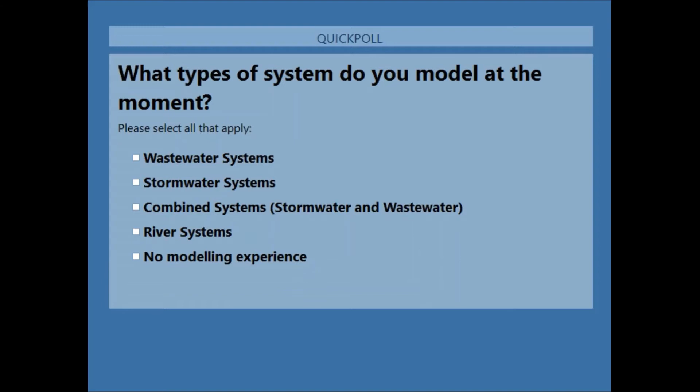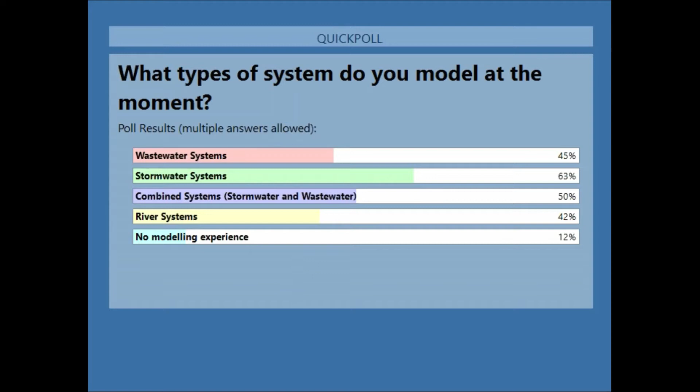And it's a good result - we're seeing a very even breakdown of the audience today as to who's been involved in the different aspects of wastewater modeling, stormwater modeling, or combined system modeling, and a good percentage of people get involved with river modeling as well, which is really good to see. The people who've not done any modeling, you are very welcome - 12% of you today, so that's a good number. Good to see you here, and hopefully you can take on board some of the things we're going to be looking at today. Let's hide that now and move on with the rest of the presentation.

So let's carry on with that and see where we're going. Right, let's go back to my PowerPoint slide. So that's where we were, and we were looking at those different aspects of the different types of models that you can do.

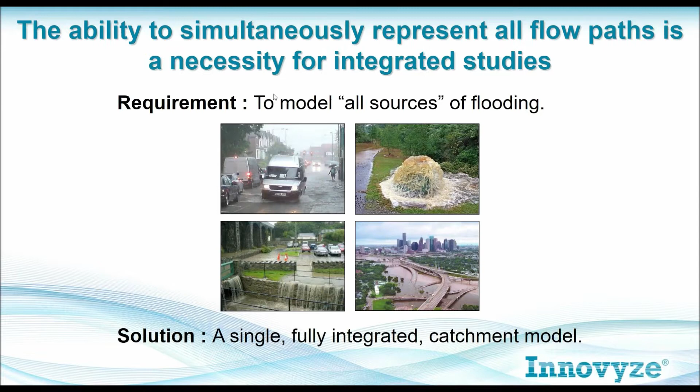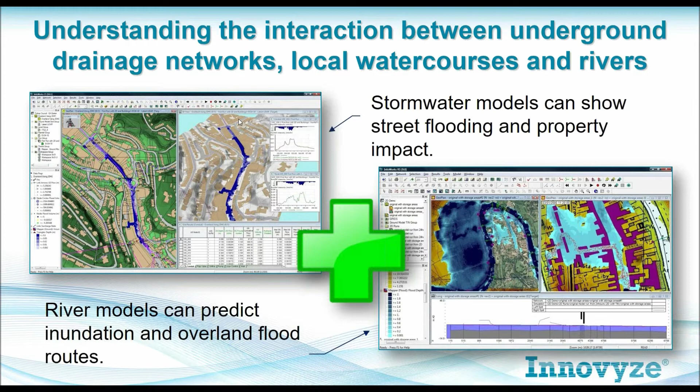Even in separate models, it can be difficult. But if you put the two together, that's a much bigger mathematical challenge.

The reason it's such a big mathematical challenge is that when we have interactions between what's happening in our man-made drainage networks—our sewer networks, our stormwater networks—and indeed within our managed river channels, the mathematics involved in looking at the water in those carriers is essentially one-dimensional. We don't have to worry about a directional component; the pipe or the river will determine which way the water goes.

But once the water leaves those structures, once it's exiting the underground pipe network via flooding at the surface, or whether a bank is inundated on a river system, we need to use an extra set of mathematics. We need to use 2D mathematics in order to ascertain what is happening and how that flow is traveling over land.

Now, InfoWorks ICM was the first application in the world to put together the two different modeling disciplines and to have both the 1D and the 2D mathematics as one. In the past, people have done these things in isolation—they've not done it together as one particular thing.

Our final question that we'd like to pose to the audience today is whether you, as an attendee, have been working with properly fully integrated 1D, 2D catchment models in the past, or whether you've essentially been working in isolation. Let's give you a couple of seconds to think about that and answer, and that will determine how we deal with the rest of the webinar today.

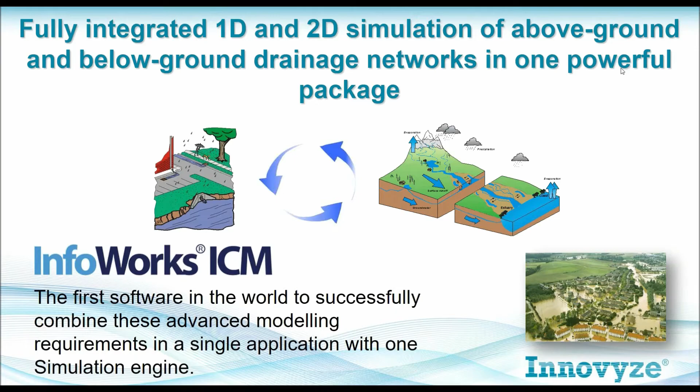Okay, so let's move on and think now about integrated catchment modeling and what's actually involved in that, when we're doing the whole 1D, 2D modeling of the system in one complete package.

Up on the screen we've got a couple of examples, one is real and one is not. The first one on the left hand side is not a real model, it's one of the models we created when we were first making sure that integrated catchment modeling, putting together different types of catchments and different mathematics, was actually feasible and doable. So it's a prototype. The other example is one of the first integrated models actually created here in the UK. Let's look at what this model is trying to do.

This is essentially a prototype model, but what we're trying to look at is a representation of a river catchment here, and an urban catchment represented here. The blue polygons represent buildings, the grey lines represent roadways, and the green dots represent the manholes for the sewer and stormwater network underneath that road. The spider web surrounding the whole model is our 2D mesh. For those who haven't done 2D modeling before, this is a bit like a blanket, a mathematical representation of the undulations in the ground, where we have steep slopes and flat areas.

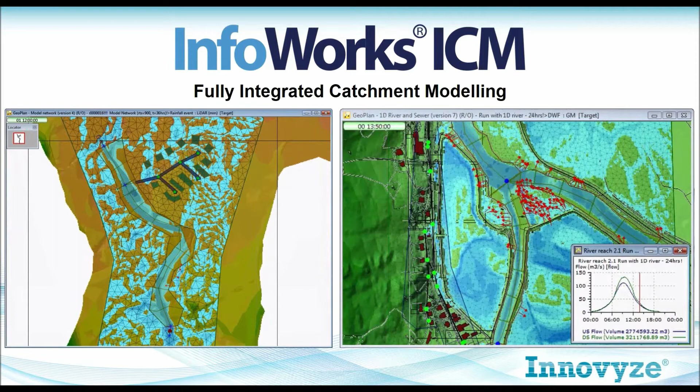And what I would draw your attention to is that it's actually quite a small model. There are very few nodes involved - you can see the green dots representing the nodes. The cross sections in the river are there to represent the shape of the river, but that's actually quite a small model. You don't need to have a great big model always to conduct a study. Sometimes the smaller versions of the software will be absolutely sufficient for what we need to do.

Now, in both of those cases there, those were animations, but I think at this point it's worth just summarizing what we've discussed so far. As far as InfoWorks ICM is concerned, what we're looking at is the full interaction of 1D and 2D mathematical processes. We need to be able to, at a technical level, put together those two very different types of mathematical processes and make them act as one, because that's what happens in reality.

In reality, what happens above the ground and what happens below the ground is all happening at the same time. And all the bits of the catchment need to be modeled as they actually are in reality, and that's what we can actually do with InfoWorks ICM. Both the hydraulics and the hydrology come together as well, because again, it's all one catchment. And if we're producing a hydraulic model, that needs to all be set within the single model.

Why do we want to do that? Why is that such a grand ambition? Well, because what we really want to do above all else as engineers is to really understand all of the processes that are happening at any particular given time. And if we have a single fully integrated catchment model, we can do that. That is a perfectly acceptable aspiration to have, and it's perfectly possible to do.

On top of that, because we're using one software application to do this, we suddenly provide ourselves with a much simpler solution - we're only having to learn one piece of software, only having to use one piece of software. So from an engineering perspective, particularly as a consultant or as a utility, we have a much more cost-effective solution to something that in the past we perhaps shied away from because it's considered to be a very complex engineering challenge. With the software that we have today, the engineering challenge is still complex, be under no illusion, but we can take a much more simple and cost-effective approach to what we're doing.

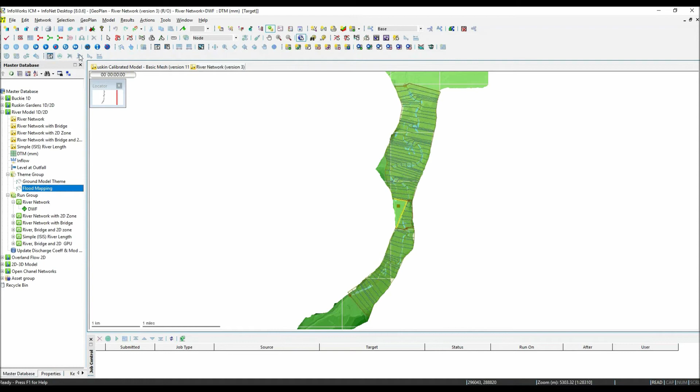What we want to know is essentially where the river is likely to be inundated when we get into a high flow situation. So all I've done is dragged on one of my flood mapping themes, and this is one of the standard themes we have in InfoWorks that allows us to look in an almost quasi 2D situation at the potential results of flooding in this model.

So again this is a maxima that I'm looking at here, and we can see very clearly where the river is. Again, we're using the blue color to indicate the depth of flooding in the catchment. The deeper the blue, the more water there is, or the more depth there is. But this isn't a 2D model.

This is a 1D model. And what we are doing is essentially using the 1D results that we have at the individual cross sections, and we are extrapolating into the dead space to get a potential water depth based on a known water depth at 2 of the corresponding cross sections. So we have actual hydraulic results on this cross section, actual hydraulic results on that cross section, but an interpolated result here. We can see the likely degree of flood spread.

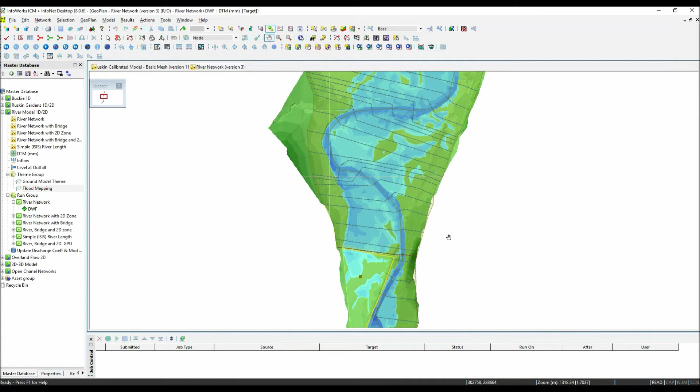Now, in this particular model, it was built because the people concerned wanted to essentially look at the protection device that was put in here to divert the river water away from this particular area. And it did a pretty good job at diverting the water away. Unfortunately, it was done without a hydraulic model, and as a result, the water didn't disappear. It had to go somewhere, and actually the water gets forced into that area by essentially doing a U-turn at the north of this catchment.

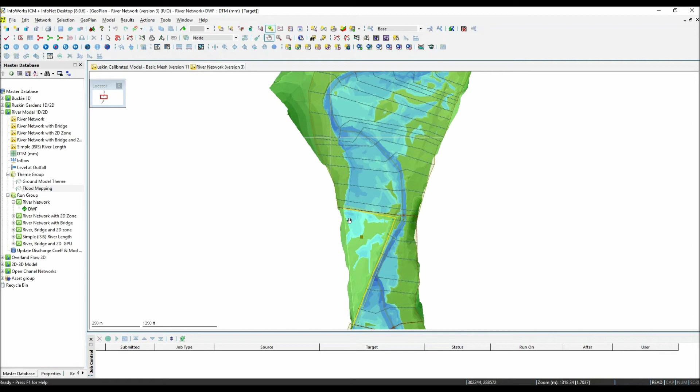But we can do these sort of things with our river models, and as we did before, we can also use our models in a more animated fashion, and we can allow time to tick by, and as time ticks by, we will get different levels of inundation in the catchment to show us the different degrees of flooding.

Now, one of the things that river catchments have, which makes them a little bit more difficult to deal with than traditional urban catchments, is that people tend to introduce other structures into networks. And in particular, we quite often find structures such as bridges. In this exact same model, in this section here, we can see that we have a bridge. Now, I could tell you that this is a bridge, and go through and describe the elements of that bridge to you, and you could perhaps imagine it in your mind.

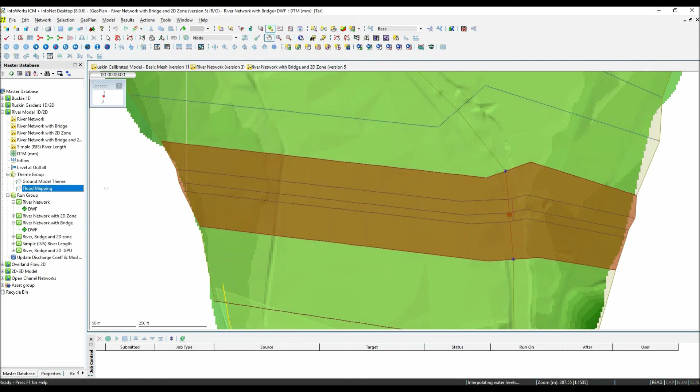But one of the things we do with InfoWorks is we try wherever possible to actually allow the software to visualize things as well as we can. So let's add the water to the model as we had before. And now I'm going to use the 3D tool that we have at the top of the network here, and put my model into a 3-dimensional view rather than a 2-dimensional view.

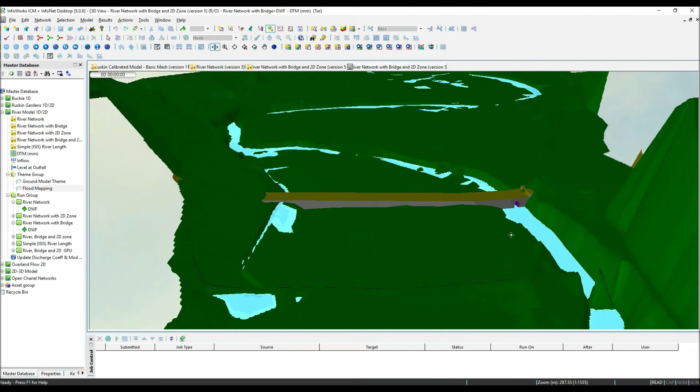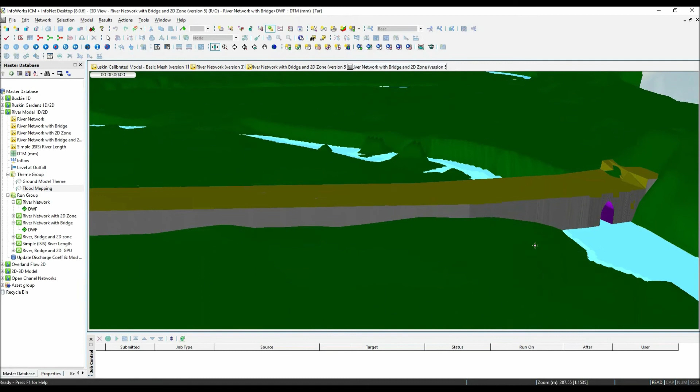Okay, so we don't anymore have to imagine what our bridge might look like. We can now actually see what our bridge will actually look like, and we can basically ask the software to create, from the numbers and the numerics and all of the data, the model of our bridge. So we can see the incoming flows, we can see the arch of the bridge, we can see the deck of the bridge, we can see everything that essentially the mathematics will see when it comes to processing.

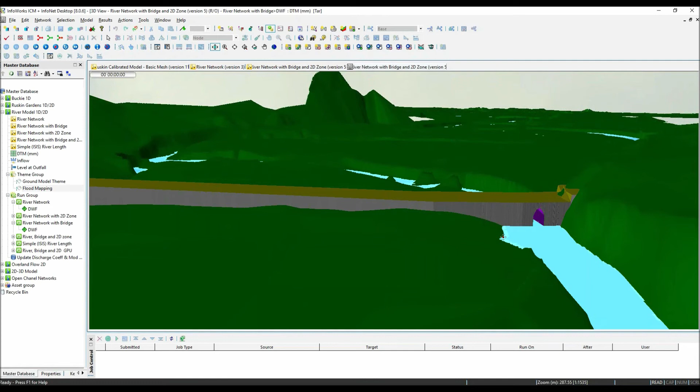For those of you who like computer gaming, you'll be familiar with these fly-through ideas. I'm not a particularly good computer gamer, so my skills in 3D navigation perhaps aren't as good as others would be. But here we are simply using the tools that the software provides to produce a visual representation of what is essentially an above ground structure.

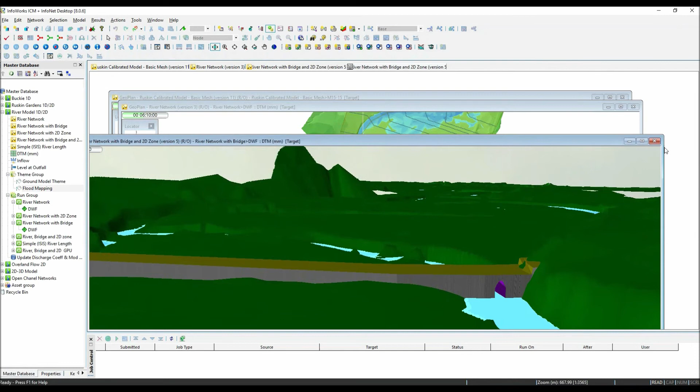We really want to see what's involved in our system and our network, but visually rather than relying on the more classical picture we had before. I've been opening up all these models without shutting the software down, so all the windows are still open. I can navigate through all the different displays, keep my 3D view up, keep my previous view up, or shut down all those views and leave myself with my working space.

Now let's take that scenario of our river model forward. That was a river model done purely in 1D, with no 2D aspects at all - we were modeling the floodplain in 1D, which is what we've had to do for the last 20 years or so, on the understanding that perhaps it wasn't as accurate as it could be. If water comes onto the surface, as we saw with our urban flood models, then we really want to use surface modeling if we possibly can.

So in this fourth example, I want to show the potential catastrophic failure of a dam or reservoir, and understand where the water goes if it's no longer contained. This is a real model, but the scenario I'm going to show has obviously never happened, and hopefully never will. Agencies, water companies, the Environment Agency, whoever they may be, have been asked by government to evaluate the potential catastrophic impact of a failure of a major asset, and hydraulic modeling is a very good way of doing that.

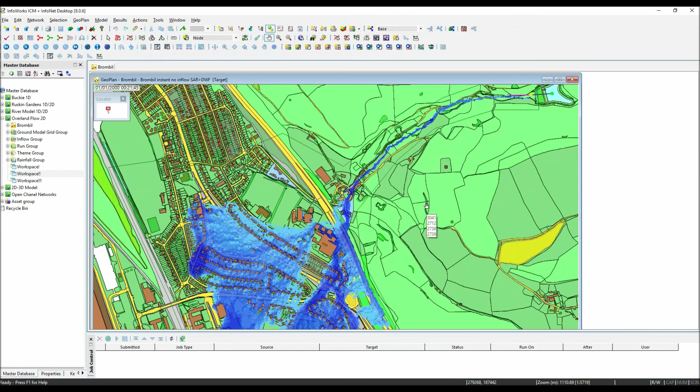So that's another use for an integrated model. In this particular case, we're integrating our reservoir with our big surface model. Hopefully those 4 models that I've shown you will give you a flavor of what people are doing.

I want to finish the look of the models at one I think is very special, a quite unique example. I was provided it by Atkins Consultants—my thanks to the modeling team located in Derby who allowed me to use this model today. They were looking to see if they could use their existing InfoWorks licenses for even more innovative types of structures.

Here they built a model where they extracted the data directly from CAD, and they wanted to see if InfoWorks, with all its 1D and 2D capabilities, could actually do something that they classically did with CFD software. So here they managed to produce a pure 2D model of an overflow chamber.

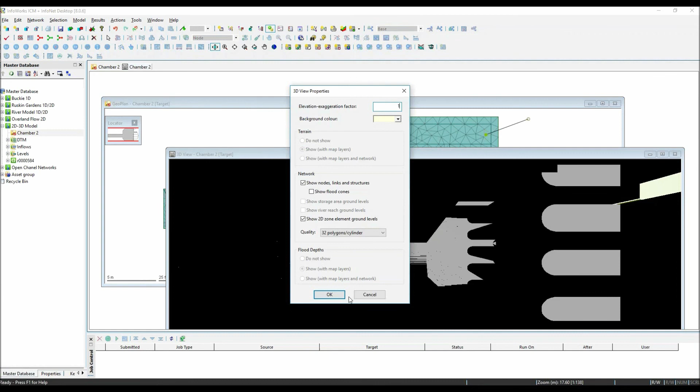I can describe that to you, and hopefully most of you, particularly with an engineering background, will be able to visualize what we can see there. But if we put that into our 3D view, which we used before to look at our bridge structure, we can use our 3D view to look at our chamber as well. So here is the main chamber.

Here is the pipe and the half pipe of the channel that's coming in. Here are the baffles which divert the flow. Here is an emergency weir which will drop water into the chamber over there. And then we have our control devices which regulate the flow from the chamber.

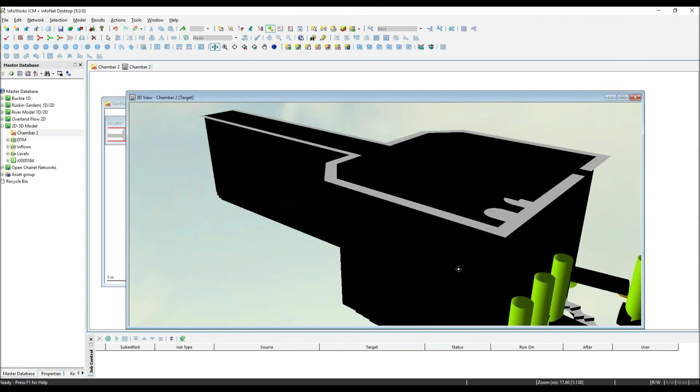So here we're using a package which perhaps people traditionally considered to be for stormwater modeling or river modeling, and here we're actually using it to do quite detailed analysis and design of our chamber. As part of that design methodology, there may well be lots of different scenarios.

It may well be that the baffles don't work particularly well in the initial design, so we have a feature in InfoWorks which allows us to do what we call scenarios—basically the same model, but with slight differences. Here we've added some training walls to try and use them to divert the flow, and here we've amended the apron into the actual channel itself. So we can look at these different scenarios.

I'm not having to drag and drop anything from the database—I can look at it here. And of course, if I put those training walls in, I can then put it back into 3D, and we can see where those training walls are in the model as well.

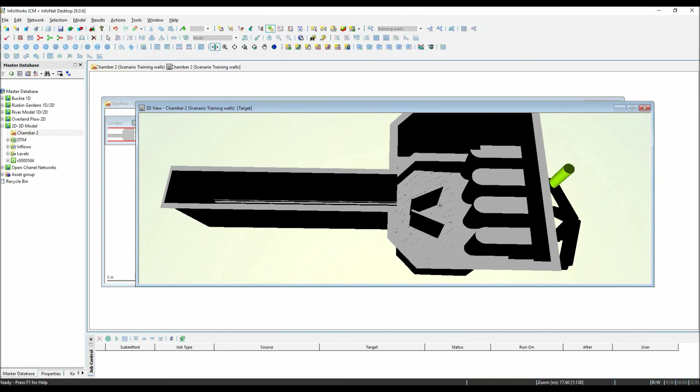Okay, so basically we've looked there in the last 30 minutes or so at integrated catchment modeling. We've looked at the different types of networks that have been created, and I've finished with what I hope you'll agree is a very interesting additional modeling scenario, which I wouldn't have thought about myself.

So that really concludes the talks I wanted to do today, and it also concludes the presentation of the software. I hope you enjoyed looking at some of those models. My thanks indeed to the various organizations who were kind enough to provide them for today's presentation. Without you, people really would not have such a good appreciation of what people are doing and the boundaries people are pushing.